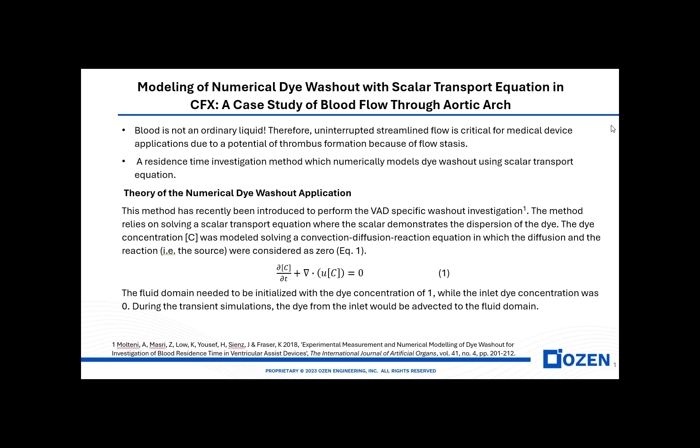The fluid domain needs to be initialized with a dye concentration value of 1, while the inlet dye concentration value should be 0. During the transient simulations, the dye from the inlet would be advected to the flow domain. The details of the model geometry and the flow conditions are shown here.

First of all, the image indicates the aortic arch geometry with anastomosed VAD outflow graft, which is an inlet to this model. And the outlets are the 3 branches as well as the main outlet. The mass flow inlet condition was applied here for a corresponding volumetric flow rate of 5 liters per minute, which is a typical VAD flow.

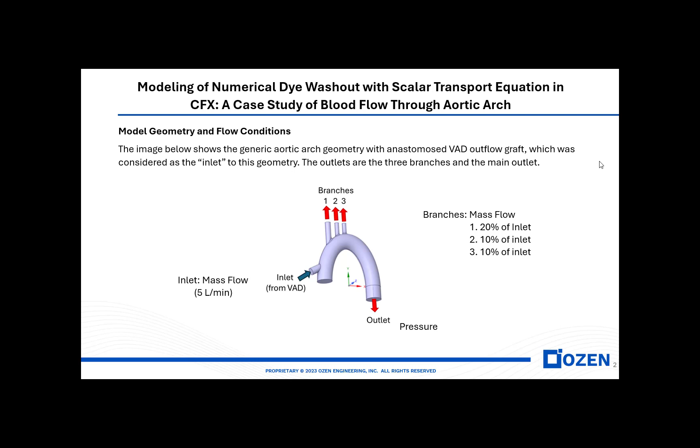For the branches, again, mass flow outlet is applied with 20%, 10%, and 10% of the flows at the inlet for the branches 1, 2, and 3 respectively. The pressure outlet condition was used for the main outlet.

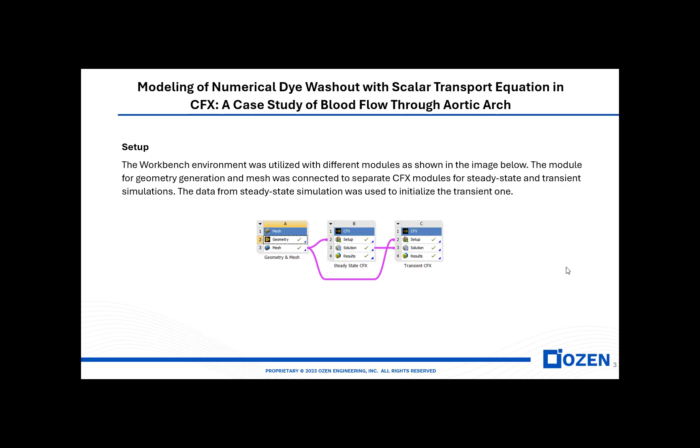For the setup, we utilize the Workbench environment where the different modules are actually utilized. Let me continue from the model here. As you see, the different components are also shown here: geometry and mesh, steady state CFX, as well as transient CFX. The mesh is actually transferred to the setup of the steady state module as well as to the setup of the transient module. But the results of the steady state run are also utilized as an input to the transient simulation. So let me briefly show you how the geometry looks.

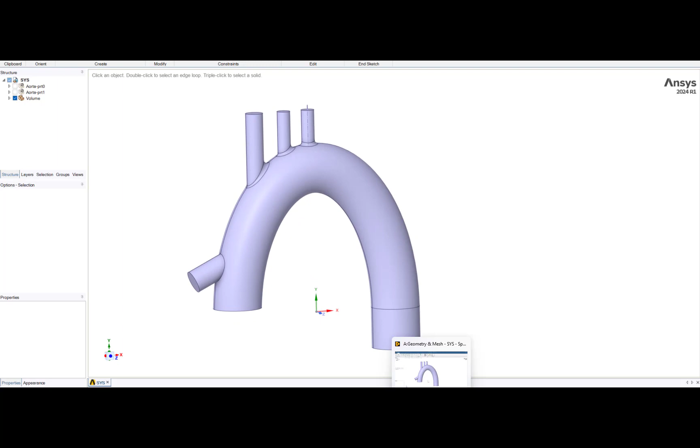Its geometry is actually generated with SpaceClaim here. Inlet and outlets are here. Corresponding mesh with some prism layers there. But don't forget, in many other applications, finer mesh as well as multiple prism layers might be needed.

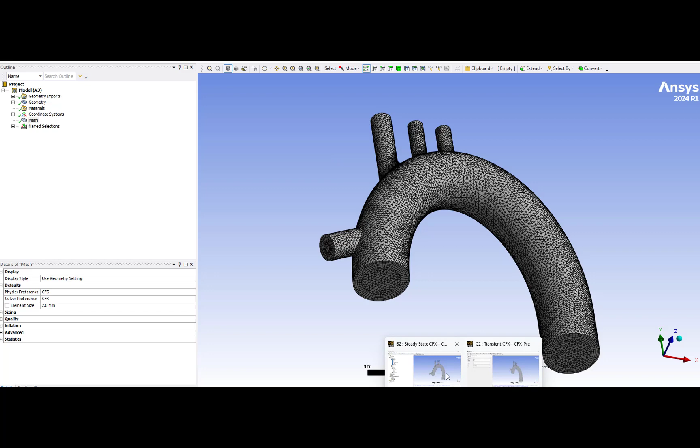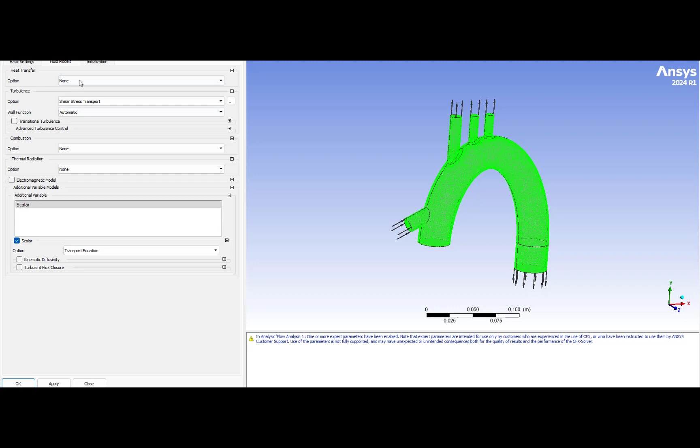If we go back to the steady state CFX, this is the pre-processing screen where the inlets and outlets are actually specified with the arrows here. As I mentioned, this is an application of a scalar transport equation. So we have to turn the additional variables on and define a volumetric scalar. And we should also define a transport equation in the fluid models section of the default domain.

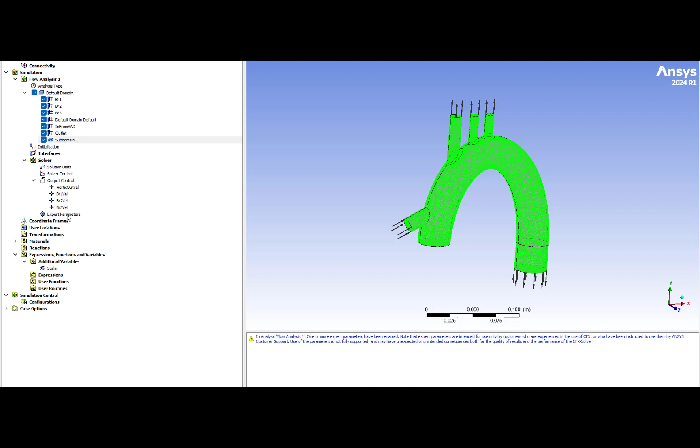Lastly, we should generate a subdomain with the corresponding flow domain, and then go to the sources and define 0 here. We can control the simulation results with certain output controls, such as the velocities on different regions, as we like to do. While running the steady-state simulation, the fluids and the turbulence are solved. However, the scalar transport is not activated yet.

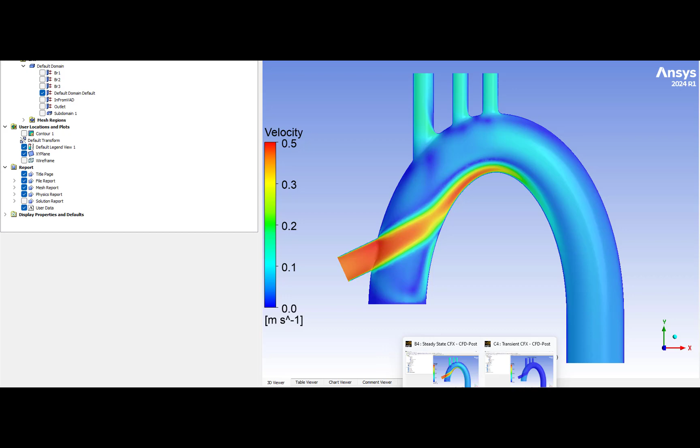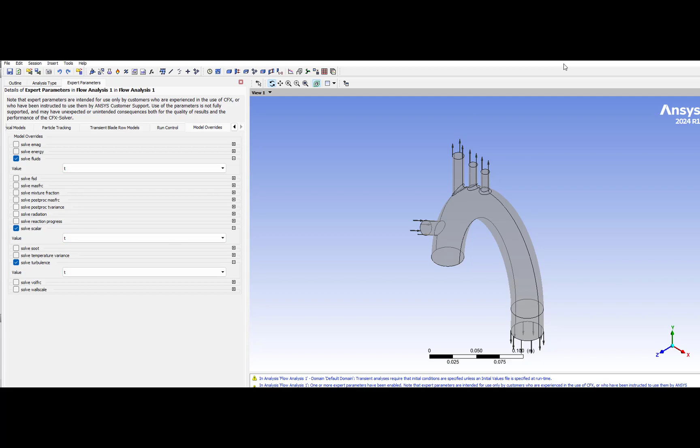So if we go back to the transient setting, we will see that this time the analysis type is transient, and we can define the total time and the time steps depending on the model settings. And when we go to the expert parameters, to the model overrides, now you see the scalar transport equation will be solved, including the fluids and the turbulence. And with that, the results are obtained.

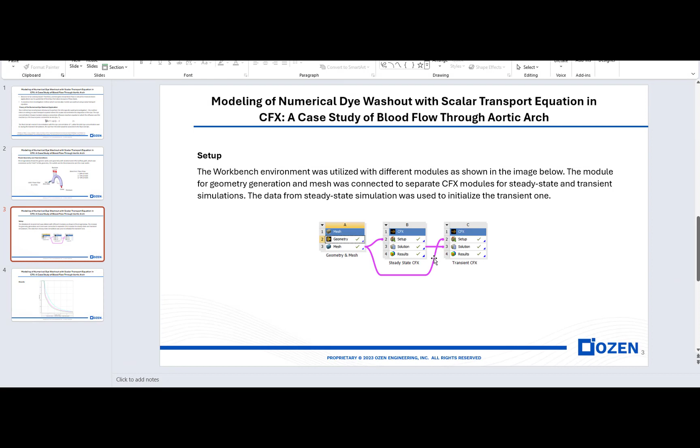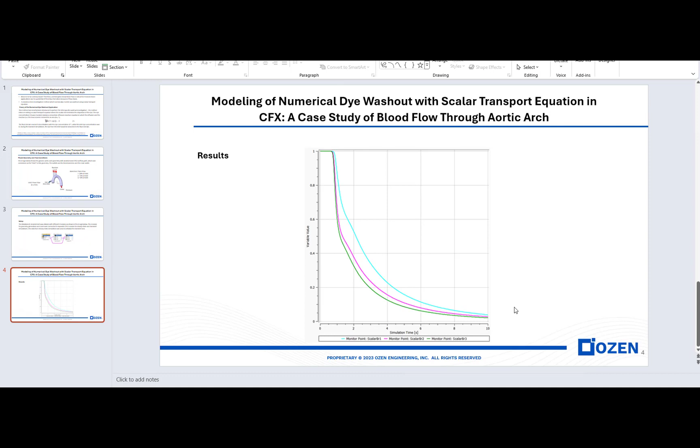So results could be demonstrated in different forms, such as the concentration profiles, as shown here. As you see, these are the three different branches, as mentioned before. And for a while during the simulation, about a second or so, nothing happens. But after the flow is advected towards the branches, we start to see the impact of the inlet dye reaching the outlet regions, and it gradually reduces down in time.

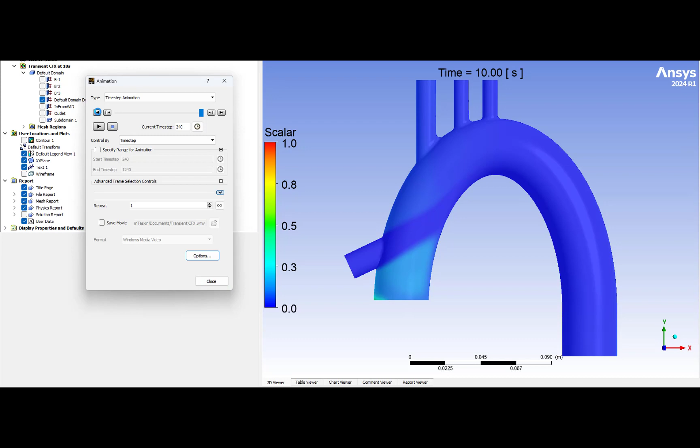Here are the results of the transient simulation. On the screen, the dye concentration contour is shown at the last time point of the calculation. Opening the animation window and bringing the time to the beginning of the simulation at time equals 0. As you see, the scalar quantity was set to 1. Throughout the iterations, when the time advances, the dye concentration changes and the dye distribution also changes.

So this method could be a helpful tool to make a comparative analysis and can be implemented to any problem where the residence time is an important parameter. In this case, it is demonstrated on an aortic arch with a blood flow. However, it can be applied to any medical device associated with blood flow at many different settings.